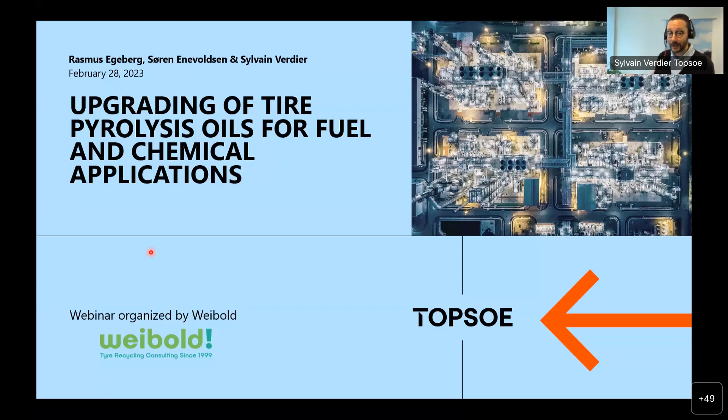Ready. Thank you, Agostina, so much for the introduction. It's a pleasure to be here. We'd like to thank you and the Weibold team for organizing this webinar. So today we will talk about how to upgrade tire-derived oil, or tire pyrolysis oil—there are several names out there, as you know—for fuel and chemical applications. So we had a great intro, thank you Agostina again for that. Of my two colleagues, Rasmus is in R&D, an expert in hydroprocessing, and Søren is now a licensing director, selling a wide range of our technologies. Søren, thank you for your flexibility—just so you know, Søren is in Japan as we speak, so I appreciate you taking the time for us today. My name is Sylvain, I'll be the host today. Mostly Rasmus and Søren will be the speakers.

Søren, what is the take-home message? What should people know in case they have to leave this webinar before the end of the hour? What should they remember from the introduction? I'll start out with the take-home messages, they will be repeated at the end. The tire-derived oil can be upgraded to produce naphtha, gasoline, aviation fuel, diesel, and marine fuels—that's one take-home message. The other one is that the chemistry of the tire-derived oil is challenging because it contains aromatics and nitrogen, and removing these to a low level is the key to upgrading the tire-derived oil. The third point is that the technology used for this is hydroprocessing.

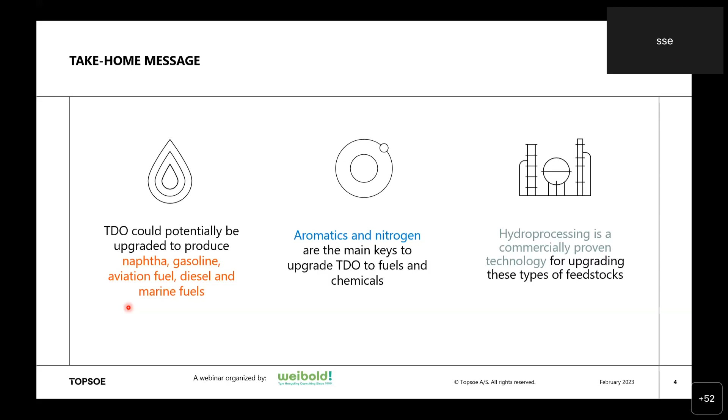And the agenda is as follows. There will be a few words about Topsoe. The second point is what is tire-derived oil actually made of, and which products could we make, and how can we make them, and then a short summary, and there will be time for questions in the end. As Agustina said in the introduction, we want this session to be as interactive as possible, so please do ask your questions and we'll take them at the end. We should have 10-15 minutes at least to answer them.

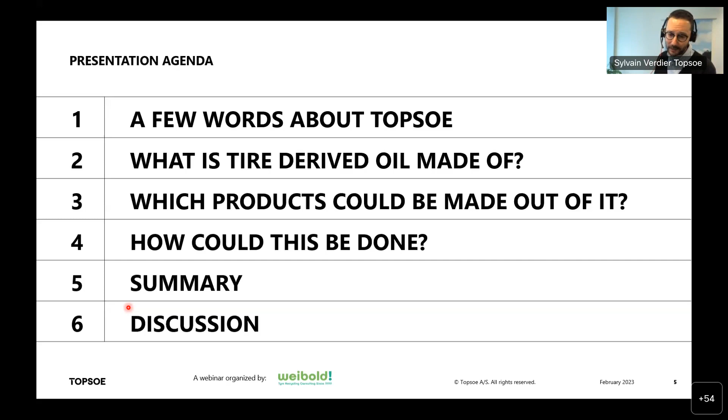So a few words about Topsoe. We are about 2,200 employees worldwide. As you can see, we are located in various strategic places, mostly within the energy related sectors or chemistry. We are number one in the world in renewable diesel, that is diesel from vegetable oils or waste oils. And ammonia, we are by far the largest licensor also worldwide. And also for hydrogen, which is a source for all kinds of upgrading of various oils, we are also the biggest licensor in the world. We are a technology-based company, so we spend around 9% of our revenue in R&D, and the revenue is close to 900 million euro, and we also make a little profit.

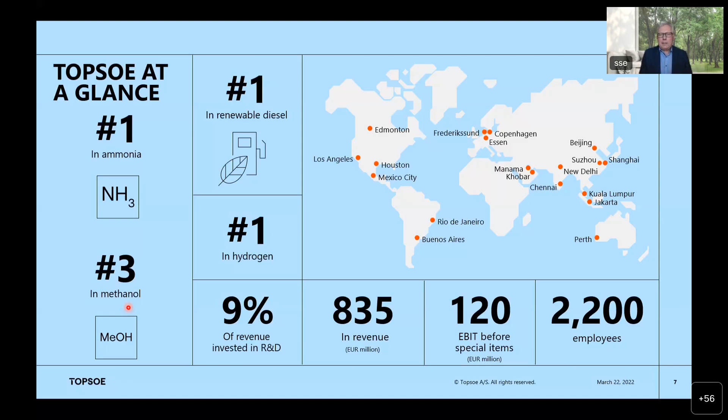So what is it we do, Søren? We do not produce fuels or chemicals, correct? No, exactly. We are a technology provider, a licensor. We provide the technological solution for these various plants, and we do the engineering design packages, and we deliver that to others to be implemented in the final design, and also for them to construct the plant. In order to make these processes happen, we are using our own developed catalysts, and in some of the processes it's also necessary to have some special equipment, special features of the equipment, and we also supply that. Finally, to make sure that things work, we have quite an extensive technical service team, and we also do regular follow-ups on the plants, evaluating performance data, etc. That is also used as feedback to improve our technologies. Good, perfect. So that was all about Topsoe. We won't bore you more about us, but it was just to set the scene because we might be in different worlds or ecosystems, so it was just to set the scene a bit.

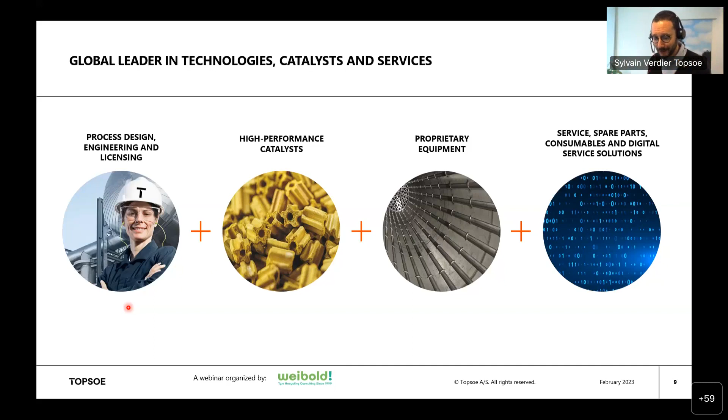Now Rasmus will enlighten us about what tire pyrolysis oil is made of and a bit of chemistry, for those of you who have not done chemistry for a while - you will have a nice little upgrade. So we want to upgrade the tire-derived oil, and for that we need to know at least two things: what is the properties of the oil that we start with, and what is it we want to end up with? First we look a little about the feeds, the TDO. So it is tires, and they have been through some pyrolysis process that's given. And the oil that then comes out is, of course, very much determined by the composition of the tires, and to a little lesser extent, the pyrolysis process. The pyrolysis process - it's mainly the temperature and the residence times that may differ from pyrolysis process to pyrolysis process. But in our experience, it is not such a big variation that it has on the composition of the oil. The oil reflects the composition of the tires.

There's a large renewable biological component, you can say, of natural rubbers, and also a lot of synthetic rubbers in there, along with other additives, the composition of which is reflected in the oil composition. So one is the very aromatic nature of almost all the components. Some of the structures are broken down, of course, but you still have the aromatic compounds left. You have the carbon black particles - those are very hard to decompose, so even though some can be filtered away or removed in other physical processes, they will also remain to some extent in the tire-derived oil.

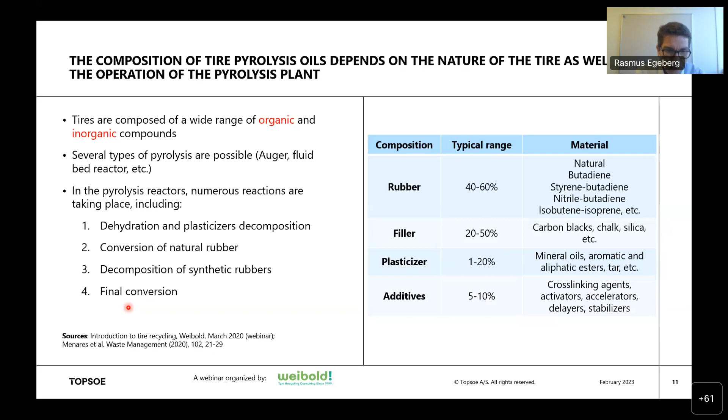Good. Okay, so the way we... I don't know if you know, but Lego is a Danish product. We don't work for Lego, but we like the Lego analogy. So here we're going to describe the properties of the tire-derived oil in 4 blocks.

The first one is elemental analysis, and it's something we look at for fossil, renewable, and alternative feedstocks. So Rasmus, for this elemental analysis, what is key for you?

Yes, as it is written here, there are basically 5 elements, and the ones in red are the ones that stand out a little. Compared to our other experiences with both renewable and fossil feedstocks that need to be upgraded, I would say, unfortunately, a little on the negative side, the hydrogen content is somewhat lower in the feeds than we usually see. That means that in order to end up with a fuel that has good qualities, at least a diesel fuel that has good fuel qualities, or also for aviation fuel, you need to add hydrogen. So you need to add a considerable amount of hydrogen, and that is something you have to consider when you design your process.

And then the nitrogen, also quite high values here, and as I alluded to, these nitrogen compounds make all the other processes more difficult because they are inhibitors. The sulfur is not the biggest problem - the catalysts are able to remove this sulfur quite easily, and the oxygen is also in such low amounts that it's manageable.

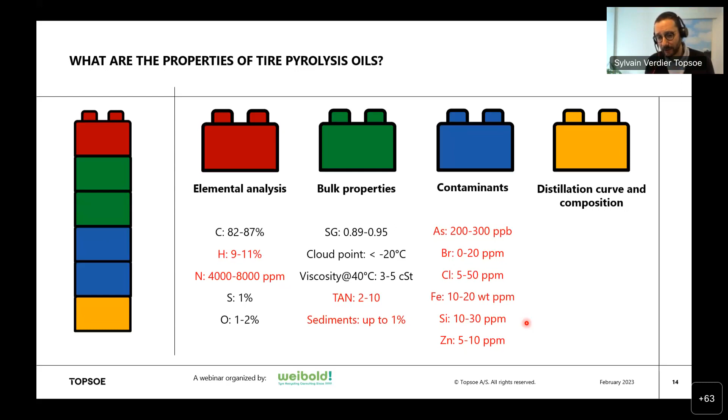Other pre-treatment processes may be needed in order to lower the levels, depending on where they are. We have seen similar levels of contaminants, let's say for plastic pyrolysis oil, for spent lube. This is not unheard of as well. It's just, again, a different combination, as you said, Rasmus.

Last but not least, it's about distillation curve and composition. So let's start with the boiling curve, distillation curve. So what is this 200, 370, 370 plus? What is it, Rasmus?

Yes, so that means that if you fractionate the tire-derived oil as it is, then around 30% will be boiling below 200 degrees. And this is more or less the boiling point area for naphtha and gasoline. So if all the other properties were on spec, which they are not, then you could expect around 30% gasoline yields.

And the next part, from 200 to 370, is kind of the diesel range. Also in this range is the jet fuel range, so that's the lower, let's say, 2/3 of this range from 200 to 300 in rough terms. So this is the yield you can then expect of this type of fuels.

And finally, boiling above 370 is what you could use for marine fuel, which is then higher than diesel boiling. So these give some rough indications, and it is very rough, and it also changes during the upgrading, as we will come back to. But it just gives you an idea about what we're talking about. Yes, as Rasmus said, during the hydroprocessing steps, depending on the design, layout, and catalyst, we will move that boiling curve. So this is again just what you have in the feedstock.

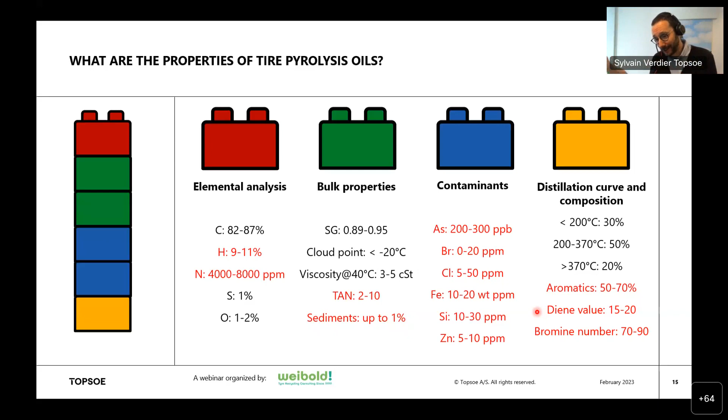Good, so that was all about chemistry. It was just a little refresh, and just to explain how we look at it. We look first, of course, at what we have, and then what we want to do, which would be the second step. But it's time to engage with you. You also have to do a bit of work here when you listen.

In a minute or so, Agustina will launch a poll, and you'll be able to click. The question we have for you, you'll have about a minute to answer, is which property is the main challenge for you when it comes to upgrading tire pyrolysis oil? We explained a bit, this is just to see if you were listening - there's no prize to win, I'm afraid. Is it number 1, sediments; number 2, nitrogen; number 3, aromatics; number 4, high end boiling point, meaning the feed is too heavy; or number 5, the high acid number, this TAN number that we described?

Please, you can answer right away as you wish. Let's see, I can see people starting to answer. Very good, we'll give you about a minute.

When you talk to customers who want to upgrade tire-derived oil, is there a specific concern they have in terms of properties the first time you talk to them, or what is your impression of it? What have you heard so far in relation to the properties? Is it something they are worried about, or are they mostly talking about the products they want to do out of it? They are mostly talking about the products that they want to make.

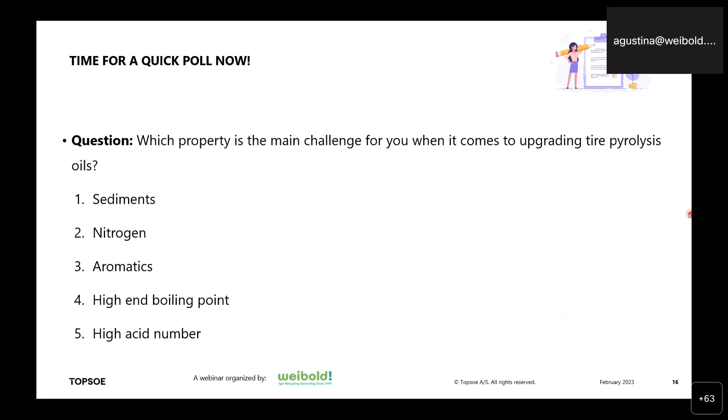Good, well time is out, so let's look at the results. Agustina, can you show the results? Yes, I have just shared the results. Okay good, so the main one - no answer 36 because of time - we have more or less equal nitrogen and aromatics. People have been listening, Rasmus, just so you know. Then we have sediments, high end boiling point, and high acid number.

Good, but it's pretty accurate, and there's not one - like all of them are important - but as Rasmus mentioned, nitrogen and aromatics are really key in terms of reaction. Cool, well let's move on to the next slide.

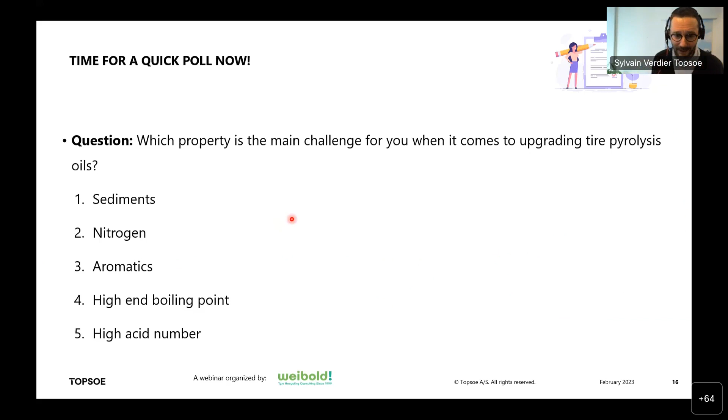The hydrogen content is around 10%, and as we mentioned earlier, or Rasmus mentioned earlier, we want to end up with 13, 14%, depending on the product that we want to make. So it means that a lot of hydrogen needs to be added. The low content of hydrogen, comparatively low, also has to do with the high aromatic content. So when we go into the process, it will be mentioned later, but then there will be the hydrogen consumption, creating an exotherm heat release, and that needs to be incorporated in the design.

We also have a little bit of oxygen. It's not a big concern, but anyway, there will be some water formed in the process, and that needs to be also taken into account, especially if we have halogens like chlorine and bromine. It also has to do with the metallurgy that is used and the solutions used to wash it out.

And then the nitrogen content, as mentioned already, is quite high. And nitrogen is also an inhibitor on the catalyst to hydrogenate aromatics.

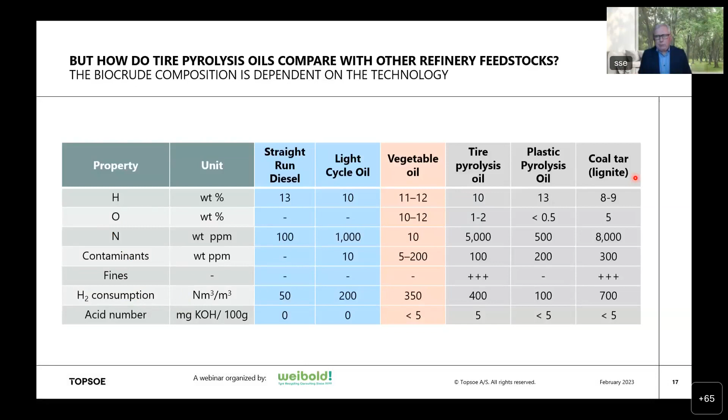So these are some of the considerations that we make when we look at these feedstocks. Okay, now let's look at the type of products we want to make, Søren. It's a little bit along the same lines - if we take the composition on the left, it has already been mentioned.

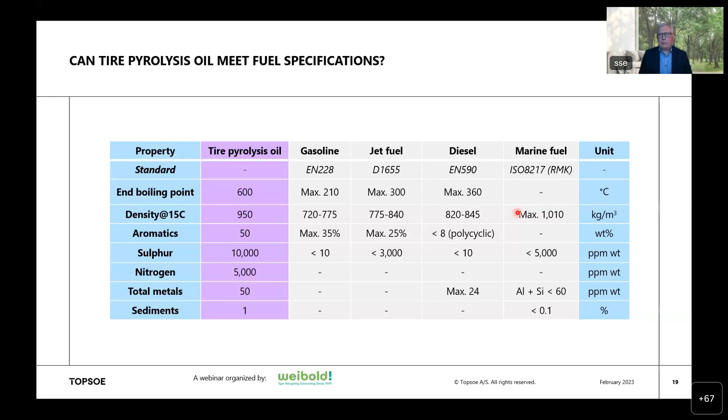Any other properties you want to discuss here, or should we move? I think we can move to the next slide. So here, I think people heard it several times already, but one last one for the road - nitrogen and aromatics. We have the nitrogen aromatics discussion again, and it's quite central to understanding what products we can achieve. But I probably don't need to say so much more about that.

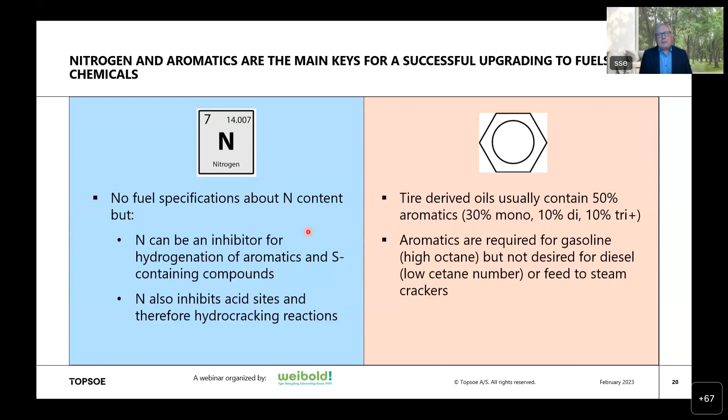Some of the questions we ask - it's not only to make fuels out of tire-derived oil, but can it be a feed to make plastic? Basically, is it a feed that could be sent, as such or maybe not, to a steam cracker to make ethylene and propylene? So what do you say here, Søren, when somebody asks you this?

To say that everything is possible. It's not the most fantastic feed for a steam cracker, again because of the aromatic content. So we need to saturate the aromatics, which is quite a task, especially when we come from these very high levels with high nitrogen. But it obviously can be done with some cracking, but also with the potential of big yield loss to gases, that's fuel gas.

Something we often say is that dilution is a solution sometimes. So although it's not the best feedstock, if you dilute it, you use very little and you dilute it in a lot of proper feedstock for steam crackers, this could limit the poor properties of this feedstock.

Rasmus, before we go to the next slide, do you have anything else to add to this discussion about steam crackers? No, I would say the yield loss is a little less concerned because basically the steam cracker takes everything except methane, and we do not crack into methane - that's not how the cracking catalysts work. But I think the aromatics, and also you can saturate the aromatics, you can still have naphthenics. They are also not good. So it's not really suited for steam crackers, I must say, the chemical. But of course, it is possible to do something, and maybe with dilution you can overcome the issues.

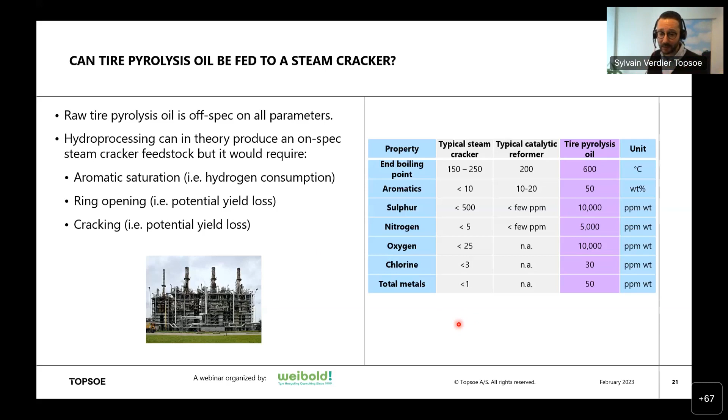Here we wrote typical feedstock properties for steam crackers, but each steam cracker is different, in terms of end boiling point, in terms of contaminants. So you really need to, in our experience, talk to the owner of the steam cracker, the operator, to say, okay, what are your specs? What can you accept?

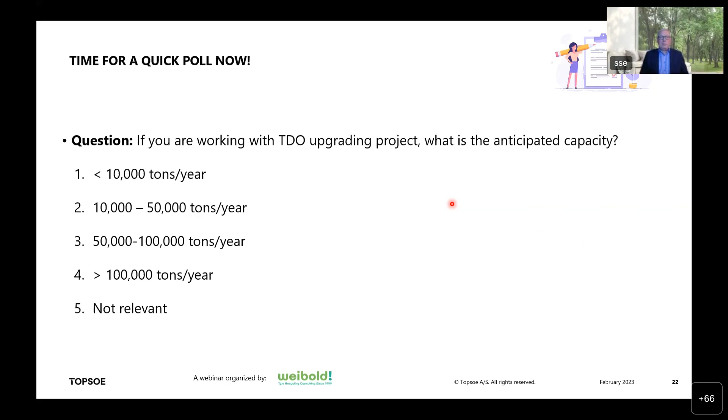Good, yes, it was just to challenge you who are listening, like, when does it make sense in terms of capacity? We can design any plant, but yeah, of course, there's an economy of scale.

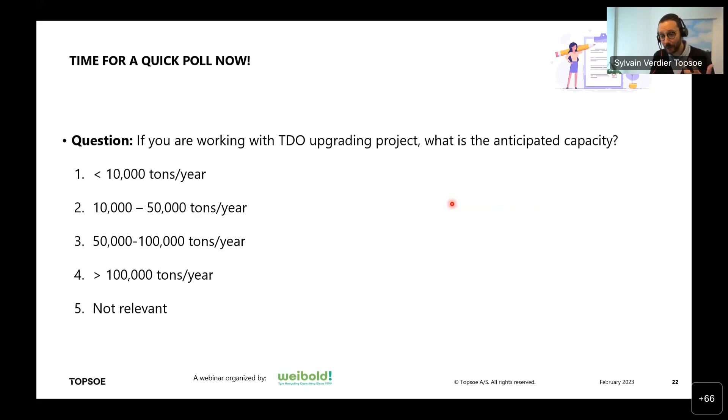So yes, okay, but how could this be done? So you have all this amount of tire-derived oil, you have decided you want to make diesel, marine fuel, or fit for steam cracker - how do you do this? Again, we're back to the Lego analogy, and here we go through the different catalysts. We address the feedstock properties, and here it's not one catalyst, but several we need. I'll put all of them, Rasmus. Yeah.

So the first catalyst we let the oil meet is the grading catalyst, which is actually a Topsoe invention developed some 50 years ago to remove physical impurities in the oil so they don't dictate the cycle length.

Here it would be the remaining carbon black particles or other physical particles that would otherwise clog up the catalyst bed and lead to a pressure drop over the reactor, meaning you'd have to shut down and replace the problematic areas. The grading catalyst has a higher capacity for these and can take up the physical particles without a resulting pressure drop, until at some point it also becomes saturated, but that's the idea, that it can take up a lot more.

Then the guard catalyst, as mentioned earlier, has a chemical reaction with the oil-soluble metallic compounds, trapping the metals on the catalyst with a high capacity, so as to run the process for a long time without contaminants slipping onto the main catalyst and poisoning it.

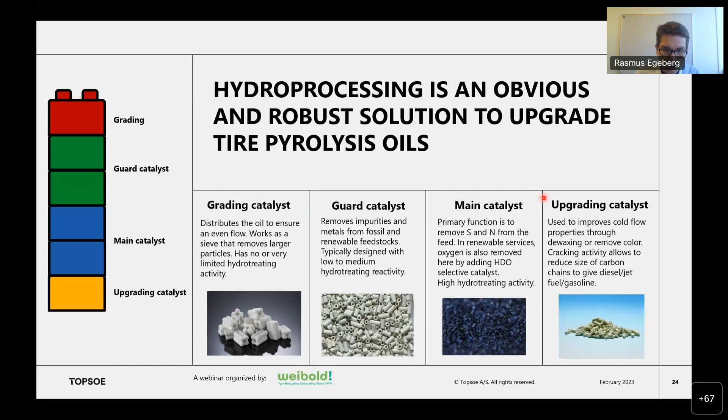And how does a plant look like? It's not a complicated flow sheet - sometimes our colleagues call it a baby flow sheet. It's very much a block diagram here, showing the different steps that need to be there, basically in this order, but there's a lot of equipment that is not shown, so don't take it for more than it is.

We start by stabilization of the dienes, the conjugated double bonds, at low temperature. Then we go to a little higher temperature, where we start trapping the metals on the guard catalyst. We go to the main hydrotreating reactor, where we again do saturation, removing nitrogen and sulfur, and saturating aromatics. Then finally some conversion where we do dewaxing and hydrocracking, in order to also get the boiling point distribution, not only properties but also boiling point distribution that we require. Then there's some kind of separation afterwards, not only gas and liquid, but also some fractionation by boiling point of the products.

So, Rasmus, we don't need 4 reactors to upgrade tire derived oil, or do we? Or is it more the functionalities we're addressing? Yes, it is more the functionalities.

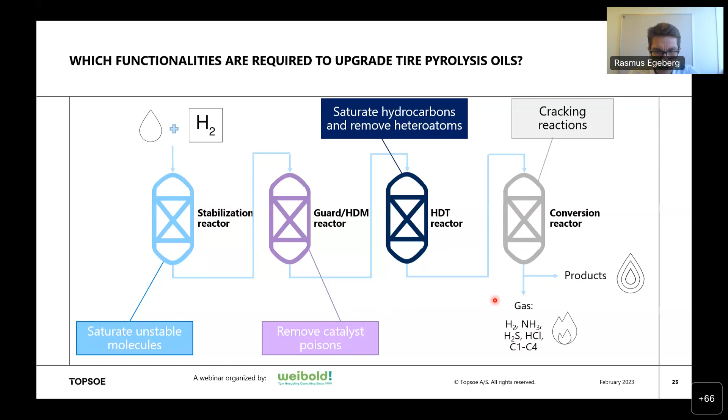Okay, and here's the last slide before the summary and discussion - some pilot test data, so something we can show. So here, Rasmus, what is it we see exactly?

Yes, so this is a sample of some of the data we have obtained in our lab here, where we do various upgrading tests. The pilot plant is shown in the schematic, where we just have a single source, a pump to feed and mix it with hydrogen, and a single reactor with a single bed. Then we do separation of gas, and TLP is the total liquid products.

We have then, offline, been fractionating the sample, and those are the graphs showing the properties of the diesel products. In this case, it was a project meant to produce reasonable quality diesel. This test was preceded by another test where we did the hydrotreating alone, removing the nitrogen down to very low levels.

You can see on the graph that we start with a one ring composition at say 10% when you have zero conversion. On the x-axis, the 390 true conversion means how much of the material boiling above 390 is converted during this part of the test. So when you convert maybe 20%, and if you then convert 50%, you have 10% remaining. But what we're seeing is that as we increase conversion, we reduce the amount of monoaromatics.

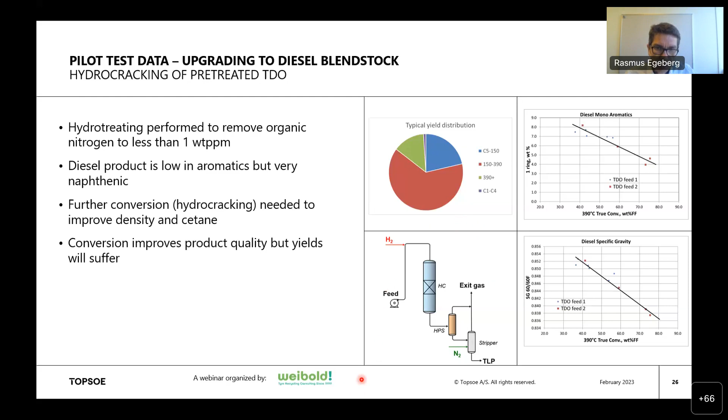Again, as we started out by saying, the tire-derived oil can be used to produce naphtha, gasoline, aviation fuel, diesel, and marine fuels. The key here is aromatics and nitrogen. We saw just before that we need to reduce the nitrogen content by maybe a factor of 5,000, from 5,000 to 1, to get a satisfactory saturation of the aromatics. So it's quite a significant reduction.

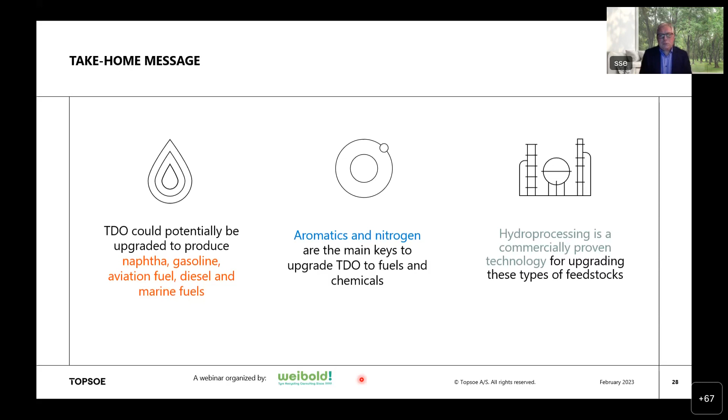We have hydroprocessing technology to do it. It's commercially proven, and we also have pilot tests that will enable us to design plants. What we can say is that we have significant experience with hydroprocessing of all types of feedstocks. I don't think you can find any company in the world with as versatile an experience as we have, that has worked as much on the scientific basis in depth with the technology challenges there are.

So we have all the fossil bases — we have hydrocracking, VGO, coal tars that are very similar to this. We've done a tremendous amount of work in that area. We also have the renewable feed bases, where we use all kinds of feedstocks. Hydrothermal liquefaction isn't mentioned here, but there's also sewage sludge and others with an extremely high content of nitrogen. And we also process plastic pyrolysis oil.

The way we work is we typically get a feed analysis from a client. We look at the chemical composition — going back to the initial stage, boiling point curve, etc. From that we can estimate where we are and what we can do. If the project moves on, we can do pilot testing in our facilities — we have around 100 pilots in our R&D facility in Denmark that can run tests.

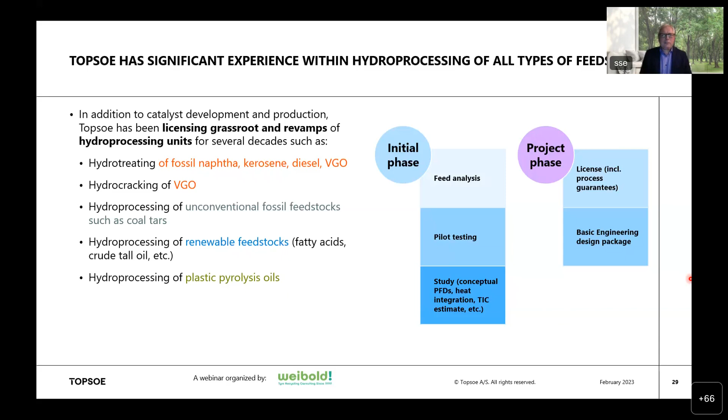First question is for Rasmus. Which pressure and in general operating conditions would you advise to upgrade to hydroprocessed tire-derived oil? I guess the answer is it depends. I would say that usually in the upgrading part, where we use our conversion catalysts, we would typically use a somewhat higher pressure than in the first section. But again, pressure is good for the saturation of aromatics.

So I would say somewhere between maybe 80 bars up to 150 bars, depending on what degree of saturation you are interested in, and again the properties of the feed. It depends a lot, especially on the feed properties. But we're talking mild hydrocracking level of pressure. Not fossil diesel hydrotreating—that will not do it alone, not for saturating to these high degrees, and also the amount of nitrogen you need to remove. And even when you remove the nitrogen, you still have ammonia that is a much milder, but still a poison or inhibitor to the catalyst. So somewhat higher pressures are needed.